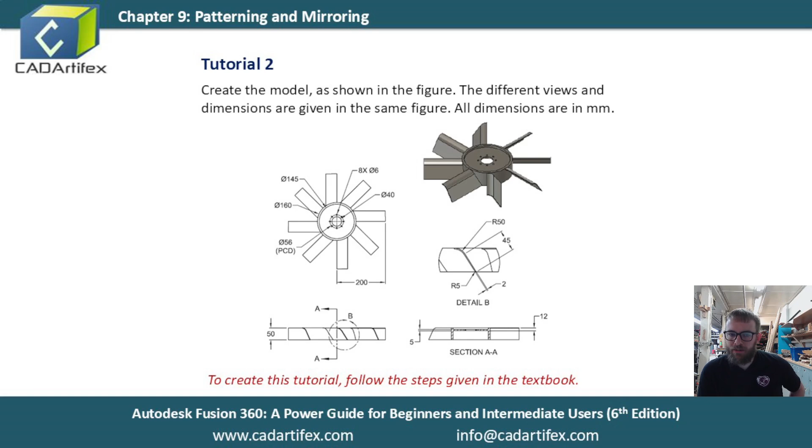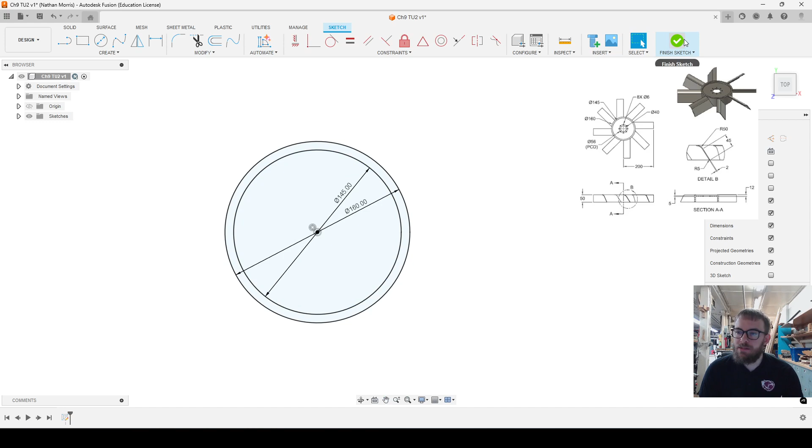We'll create a sketch on this top plane, and that is two circles. One is 145 millimeters, and another is 160 millimeters. Hopefully all of these things by now are super easy to do, these sketch objects, but if you need more information, go back to one of my previous videos. I walk through how to do a lot of these steps a little more. So we'll hit finish sketch and hit E to extrude just this area.

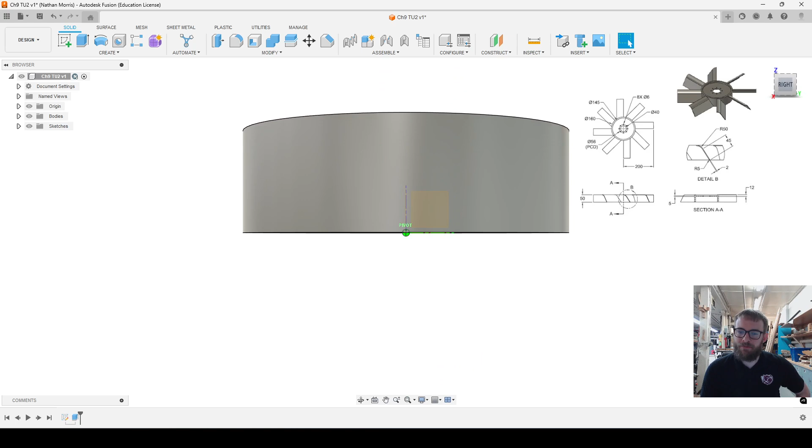Now, if I was to go this distance, it is 50 millimeters. Oh, I hit enter there too fast. If I was to go 50 millimeters and then hit enter, that would put the origin plane on the bottom of this cylinder. But later on, I want to reference the center of this, and so instead of extruding one side, I'm going to extrude it symmetrically about the origin, and do the measurement as the whole length. Now you can see that my origin plane is right in the middle of this shape.

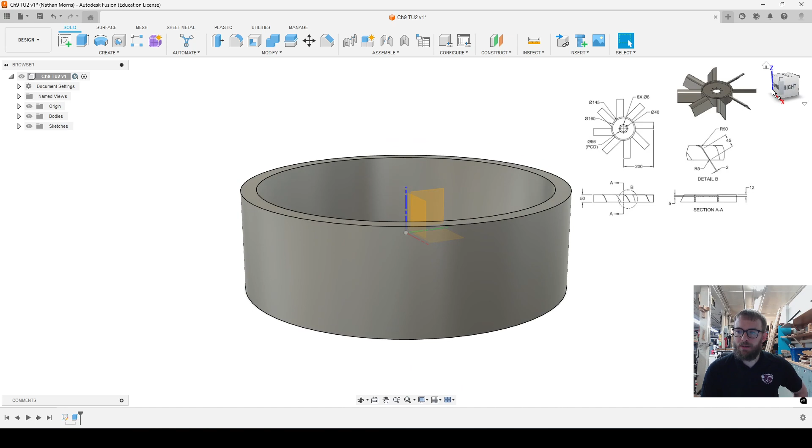That'll just be handy later when we go to draw some sketches and use the origin as a reference. So we've created that cylinder, it's 50 millimeters high, we extruded it symmetrically, and now we're going to start drawing the little top ring, or the little part that goes inside this.

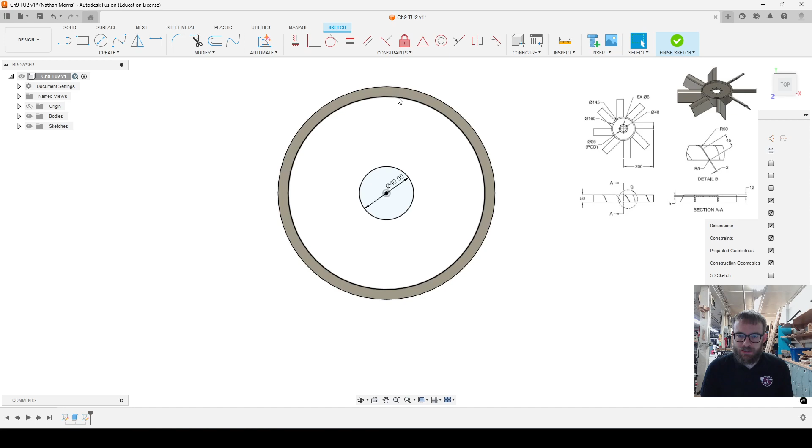I'm going to do a sketch on this top face of that profile, and then create a circle. This inner circle is going to be 40 millimeters, and then we just want to go to here. So I could draw a new circle that's 145 millimeters, or I can hit P to project - it's also in the create drop-down menu, project, include, project. So I'm going to select that circle and project it.

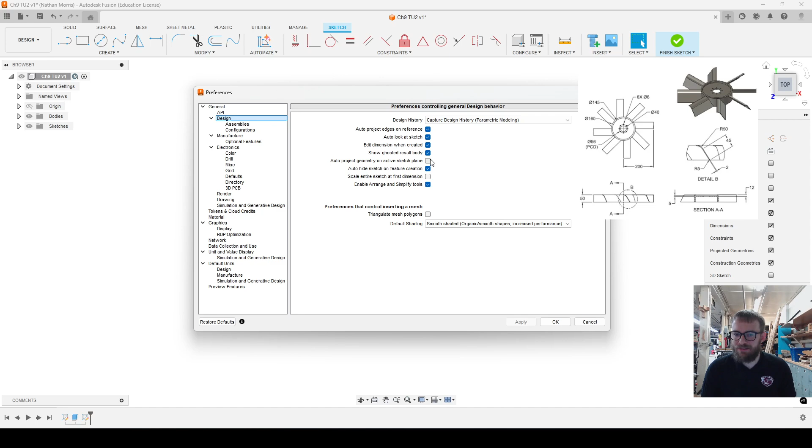If in your preferences, under design, you had auto project edges on reference - well, I already have that selected - but if you had it auto projecting geometry on active sketch plane, you wouldn't have to project that. But if you don't, then you need to manually project it, so hit P and then select that.

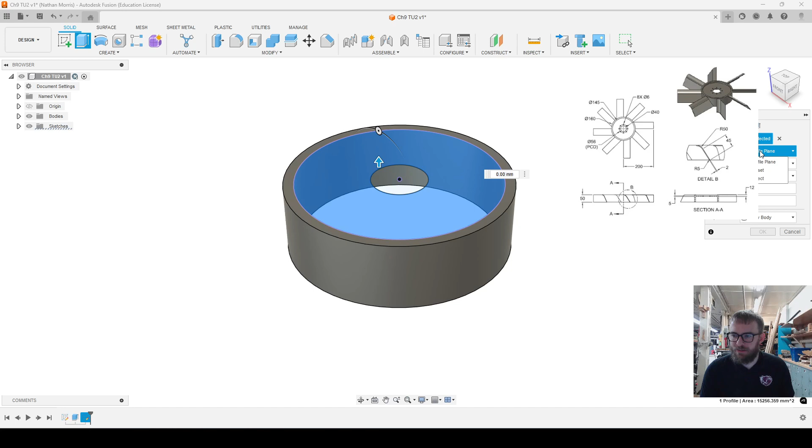So I finished that sketch, and now I'm going to extrude this area, but I don't want it to be extruded right flush with this top face. I could have done an offset plane from that top face, but this is a handy little tool inside the extrude - instead of start, I can select offset as an option here. Let me move that so you can see this menu. Right here I can click offset, and I'm going to offset -12 millimeters, and then that's going to start that down lower, and then extrude this 5 millimeters. So that left this little lip here by offsetting it from the original start plane.

So that was really handy, and that's what the book suggests to do there. You could have created an offset plane from this top face and then gone down 12 millimeters and based your sketch on that plane, but this is a quick and easy way to do that.

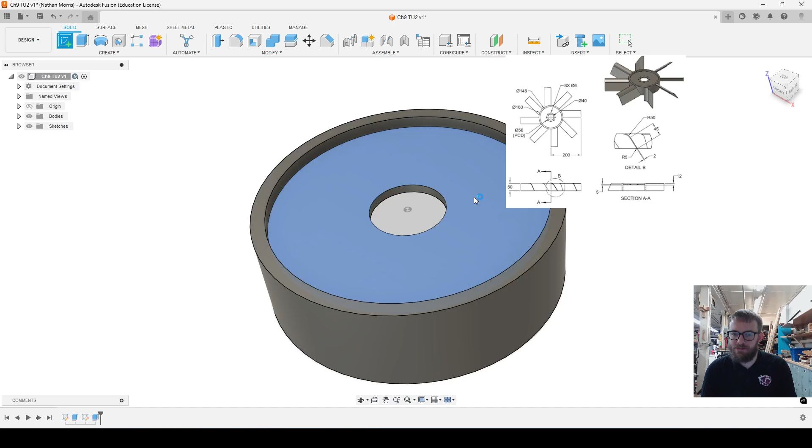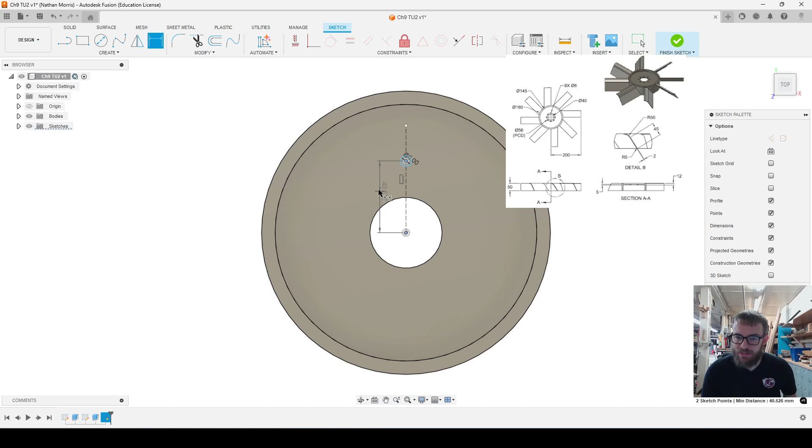So now we're going to create another sketch on this inner face, and draw a construction line. I hit the L hotkey to get the line, then X to change it to a construction line, and bring the line up somewhere here. Hit X again to make it not construction, and C for circle, then draw that circle. That is 6 millimeters. Then D for dimension, I'm going to dimension from that center point to that center point. That is supposed to be 28 millimeters.

With that, I could do a circular pattern around here, but instead we're going to do it in the solid modeling tab. So I'm going to finish the sketch, extrude it first, and for extent type I'm going to do all and flip it so it goes through this entire piece here, then hit OK.

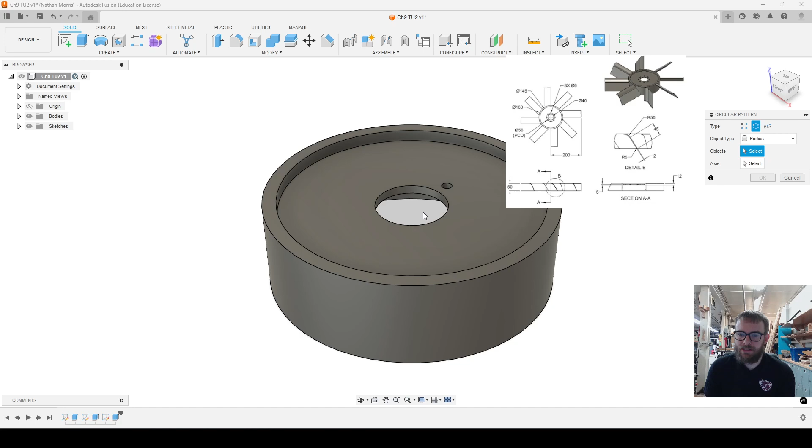It automatically defaulted to cutting out. Now I'm going to do the circular pattern to this hole. The book shows that instead of selecting features, which is the way I've done it in the past—I've done features and then selected this—you can also select it in the graphical area with features, but you can also do faces.

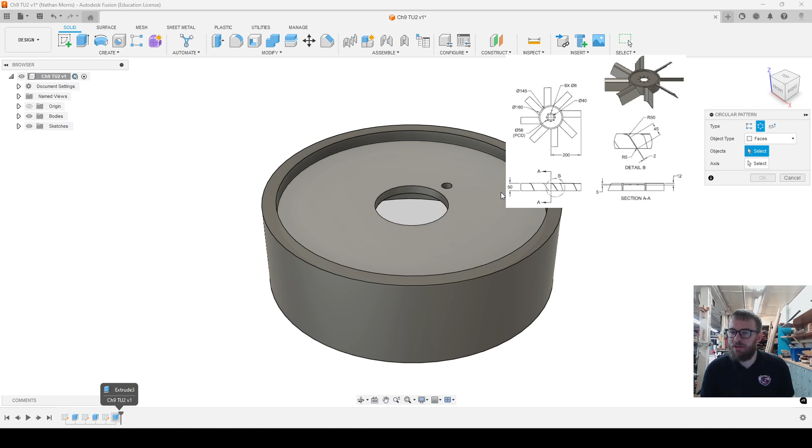Maybe if that was created through more complicated geometry, it wasn't one simple extrude, maybe you'd extruded twice or had different things going on, you could select the inner face of this cylinder and then select the axis, and that will do the same thing. For the axis, you can select anything round—this face, this circle, as long as the center axis is in the middle, or even this axis. All of those work the same way.

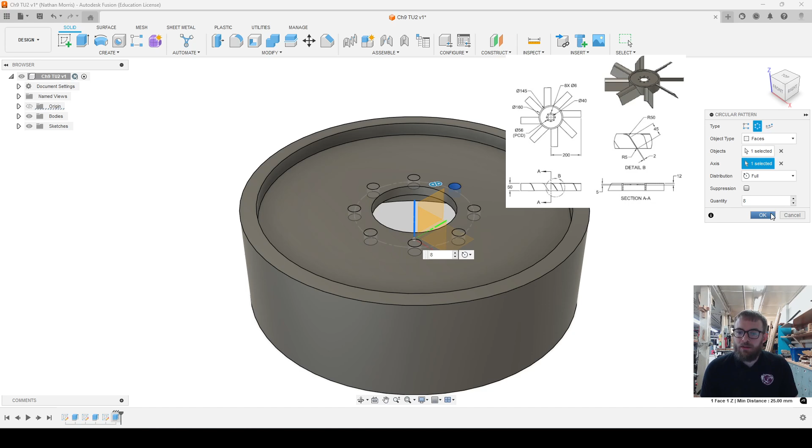So we want 8 of these, I believe. Let me double check that. Yes, 8. 8, and then hit OK, and now you have 8 holes in the center of that. Maybe that's a bolt pattern.

So we are going to go ahead and do the fan fins now. I'm going to create a sketch—or actually I'm going to create an offset plane first, and offset it from this right plane. Let me double check on that dimension. Offset plane of 200 millimeters.

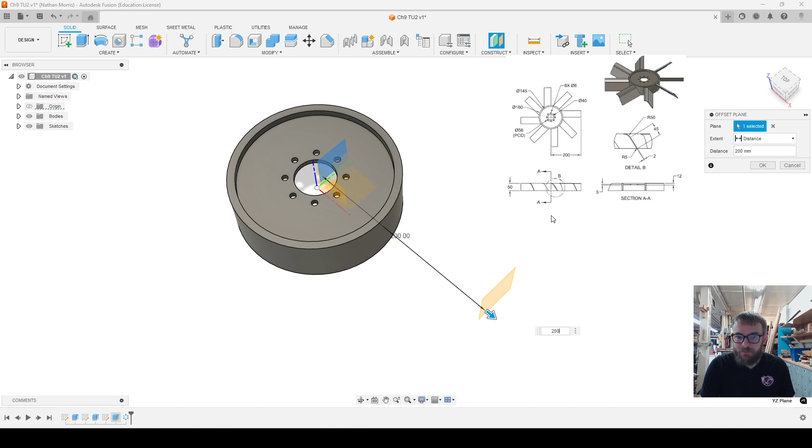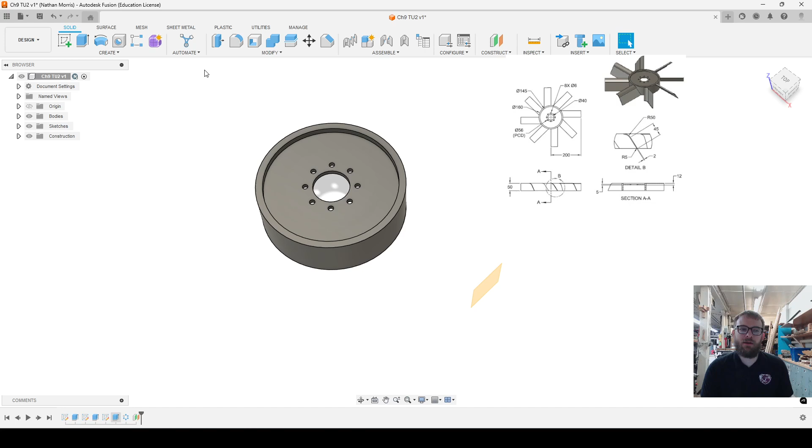So this would be a way to do this where you could create a plane. Maybe you know that your overall fan radius is going to be 200 millimeters. Since this cylinder was all oriented around the origin, which is the best practice, you can just offset from that origin plane, come out 200 millimeters. Now I know that the outer edge of this fan blade is going to be right there, a 200 millimeter radius from the center. So I'm going to create a sketch on this plane, and now I'm looking, and you can see that the origin is now centered too, since we did that symmetric extrude.

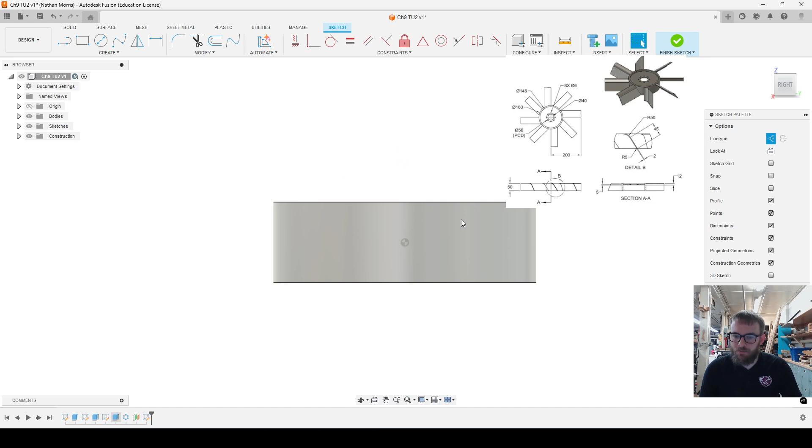So I'm going to reference that as I draw. First I'm going to do a construction line upward, and it just needs to go up above that. I'm not sure why it projected something there. All right, so it should go up vertically there. Again, I probably shouldn't have auto project edges on reference turned on.

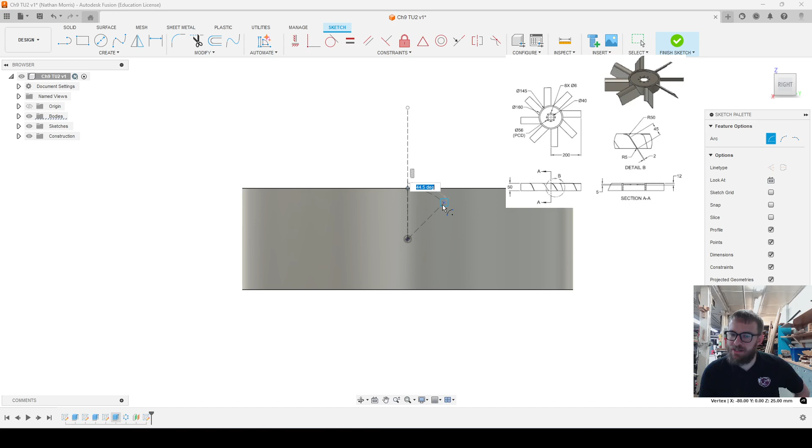So anyway, draw a construction line there, and then we are going to do some curves. So I'm going to do the arc, center point arc, and this arc is supposed to be centered on the origin. That's where it's handy to have the origin in the center with that symmetrical extrude. I probably should have made this not a construction line curve, but I'll change that afterward. So I'll go ahead and just add that curve roughly where it needs to be. I'll hit escape, select that, and then make it not a construction line anymore.

Lights on behind me.

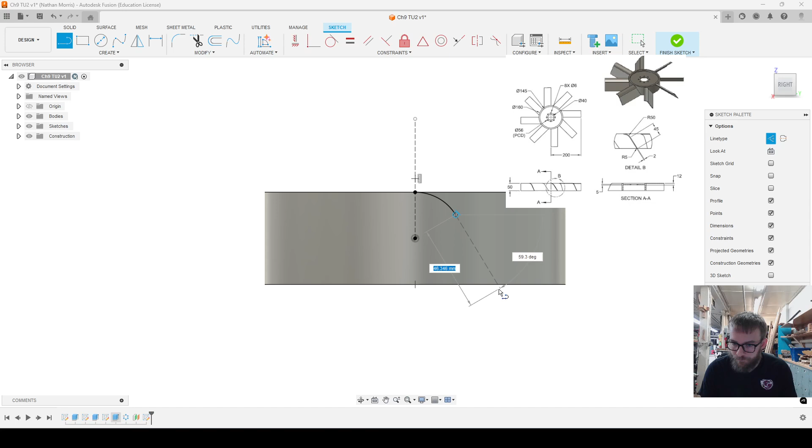So now I have that curve, and then I need a line coming down, and this is going to meet that bottom edge.

This needs to be tangent to that curve. Oh, it already is. And then it should be 45 millimeters long. This should be a radius of 25. Okay, it is automatic because of the center being on the origin. This is 50 millimeters tall, so that's got to be 25.

And then I'm going to create an offset from this line. I could have individually drawn these, but it doesn't really tell me how to do it in the book, so I'm just going to do it this way. I'm using the offset tool right here. You can hit the O hotkey and select those lines. Chain selection is on, so it's selected both the curve and the line.

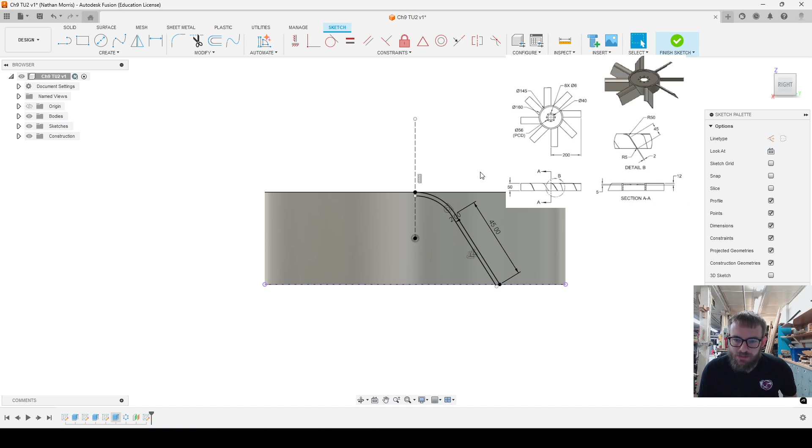So right here, I need to draw a line from here up to here, and that completes that shape. And then this, I need to bring this line back up a little bit, and I'll use the line tool and drag from there to make a curve. This radius needs to be 5 millimeters, and then I have that shape all locked in.

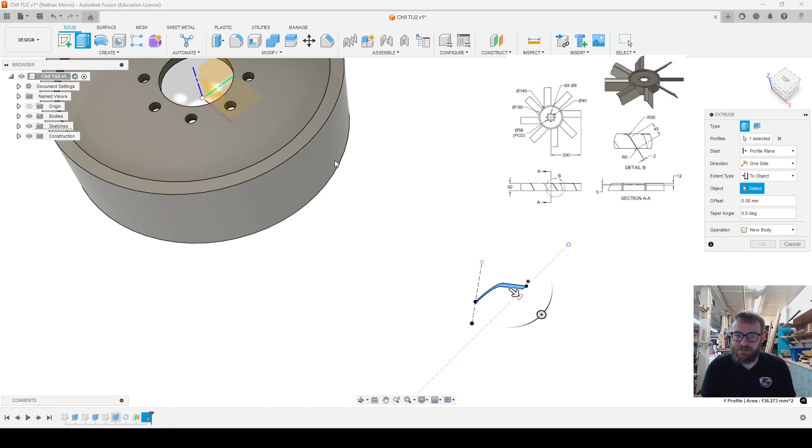So I'll hit finish sketch, and I'm going to extrude that shape that I just did. Now, this extent type is going to be to object, and for the object, I'm going to select this outer face of this cylinder. It's going to body, not through body. If I'd selected through body, it'd want to go all the way through. I just want to do to body, not to adjacent faces or just to the selected face. So with that, I can hit OK, and now I have my first fan blade.

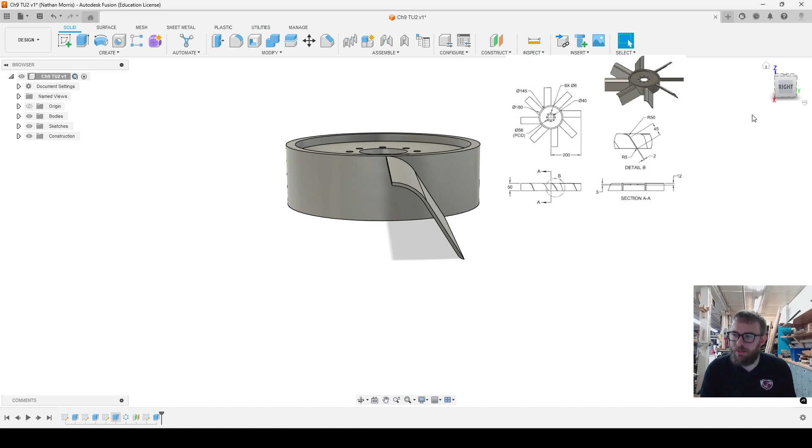It's kind of interesting how they chose to align it. To me, it feels like the center of the blade should have been lined up here, but that's all right. They're demonstrating how to use these tools. Maybe they have a reason for it.

Now we're going to go to the Create drop-down menu, and we're going to go to Pattern, Circular Pattern. This is an example of a way we'd have to do a solid body circular pattern here. There's no way we could have done this within our sketch, because our sketch was perpendicular to that plane, and we would have had to make duplicate sketches. It would have been a pain. So this is a much easier way to do it.

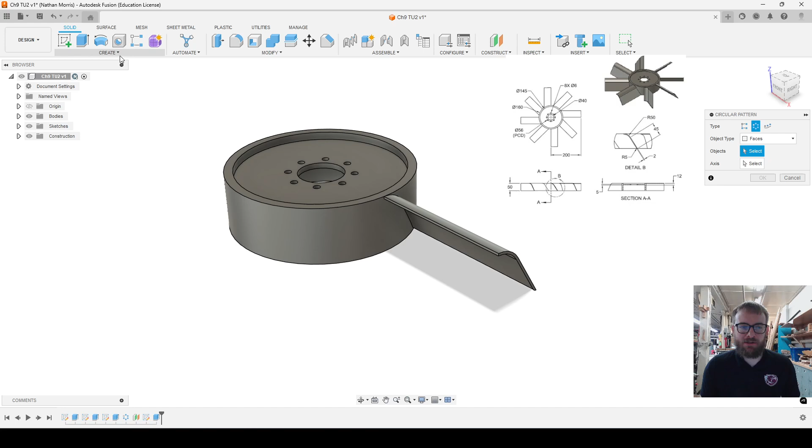For this, we're going to do features, I believe. Let me double check if they don't want us to do it another way, but that's the way I would do it. Yep, we're going to select features. We can even just click on that shape or select it down in the timeline. And then for the axis, again, anything round that's centered on the origin plane. Now you can see it is looking right.

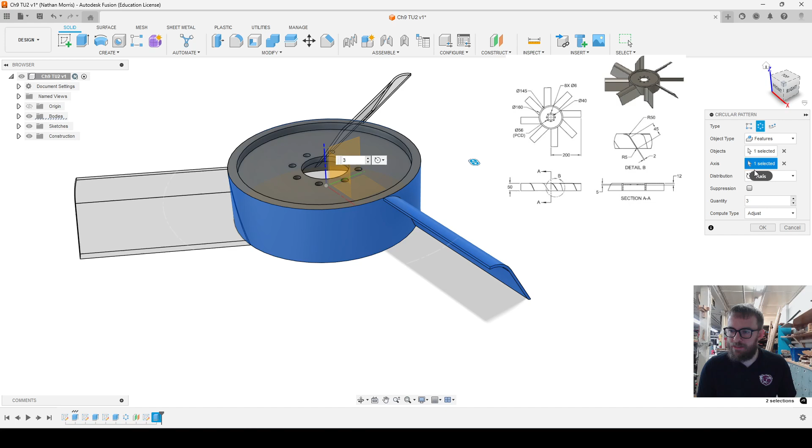So we want 8 fins as well, and this all looks good. However, from experience, if I hit OK right here, it sometimes works right and sometimes doesn't. Apparently it worked fine this time, but I tried this earlier and it was wanting to flip 4 of these fins. 4 of them went right just around the outside and 4 of them flipped.

But one way I did find to fix that is changing the compute type from adjust to identical. What adjust does is it copies your constraints through to every copy of the circular pattern. Identical doesn't copy the constraints, it just copies the object, so it doesn't try and adjust things based on how they're related to other things.

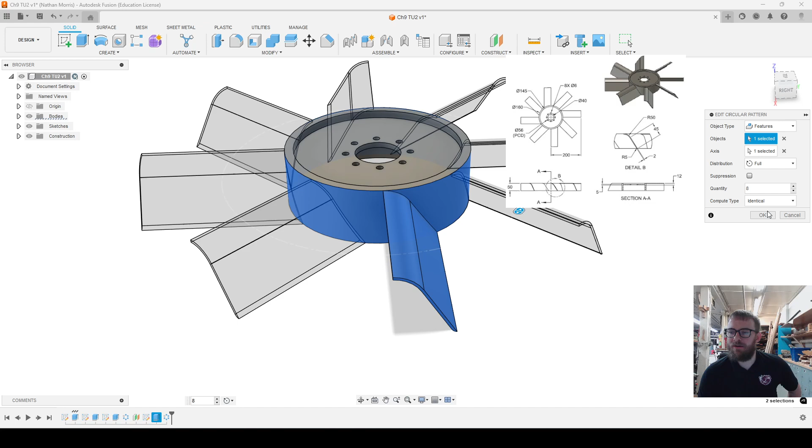So anyway, if you're running into an issue where it's wanting to flip through this, if you're following along, you could try selecting identical instead, and then it won't get smart and try to turn some of them. It just makes identical copies. So either way is working for me right now, but if you run into issues, you could try changing that option.